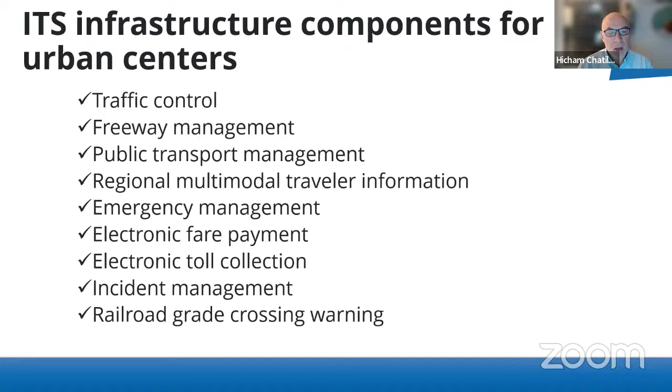Lastly, I want to talk a little bit about this. As part of the USA National ITS Architecture, there was a recognition that because we are dealing with technology, and technology moves very fast, the technology available, let's say, last year or the year before could make significant advancements this year or next year. So we have to be nimble. There was a recognition that we need to follow a very systematic approach, and so there was an adoption of what we call the system engineering V diagram.

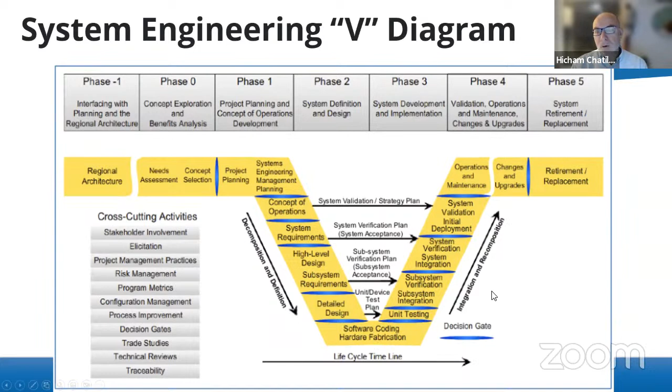This is kind of the same diagram, but this basically shows the steps of how to use the system engineering diagram. Again, there is quite a bit of information at the USA National ITS Architecture website I showed.

So you start again, if you don't have an architecture, you can still start at the concept level, then develop a concept of operations, or what we call a ConOps, and then you develop the functional requirements, then the high-level design, detailed design, and then the system software development.

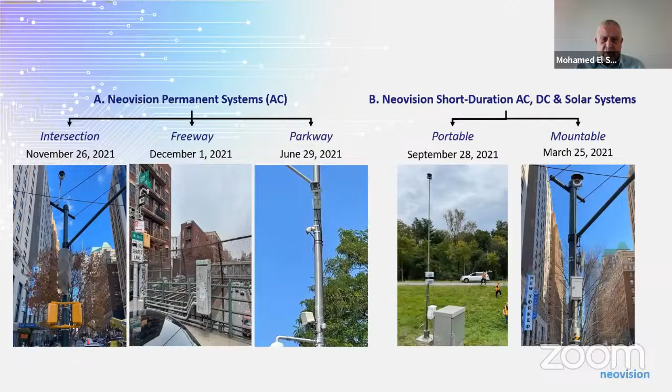We produce two types of system. They are next generation, real time, and here we're going to focus on the systems that we are currently testing with New York City successfully, and they are for intersection and parkway. They are AC, and we also have our short duration AC/DC, which are good for AC/DC and solar. You can see both of them on the screen.

The permanent system components as hardware: the most important components are the camera, which for intersection is the Axis P3807 network camera. It's a very good camera, it has 4 lenses, and our edge computer, which is top of the line, and it's made in Taiwan.

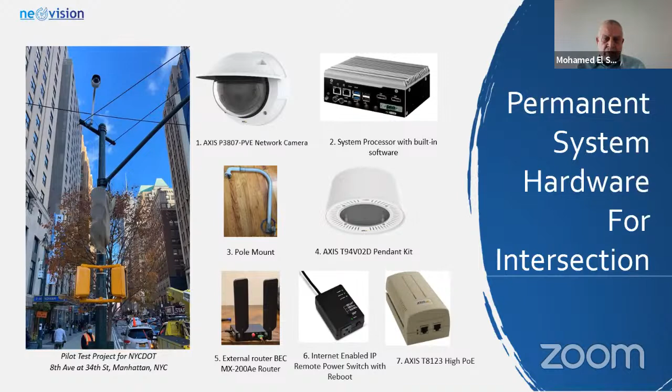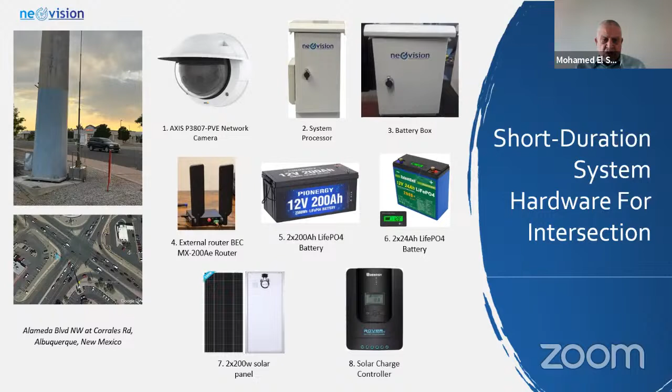These are the hardware components for short duration, which is also the same camera and a processor that is designed, planned and produced in Turkey. And it shows the solar and DC type of power. As software, it has the 3 important.

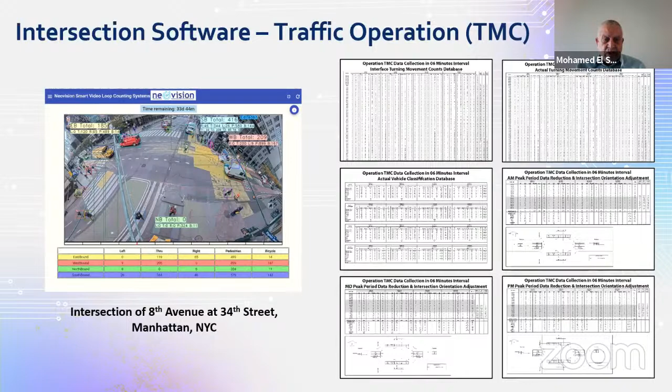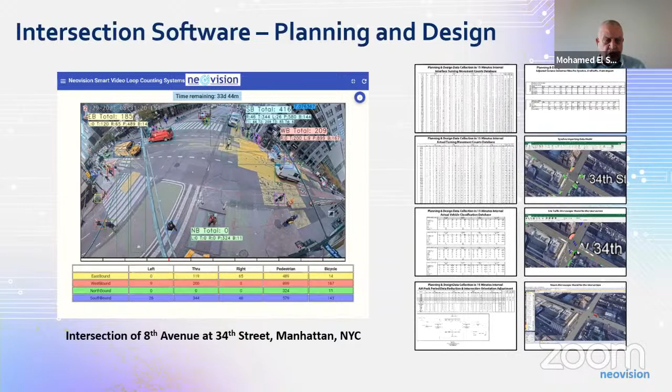It is good for traffic operation monitoring. It is good for multimodal data collection, and it's good for providing traffic analytics, just a good group of measures of effectiveness. And as we said, it's good for the real-time traffic system management data, and at the same time, it's good for data for planning and design for engineers to use.

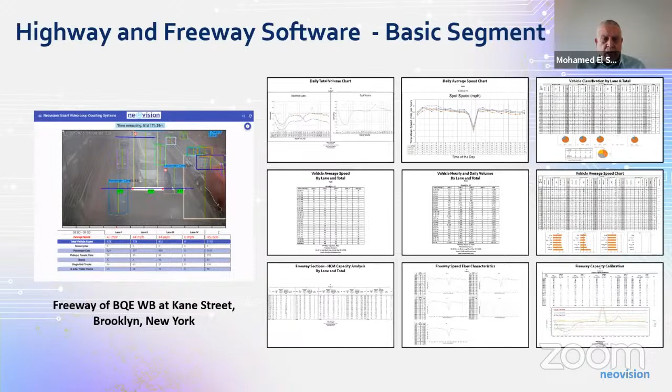And it's also good for uninterrupted flow facilities, and it produces a full package of Highway Capacity Manual results, by lane, for average speed, vehicle classification, and measure of effectiveness. It's good for the 4 components of the highway, which are basic segment, on-ramp, off-ramp, and weaving area.

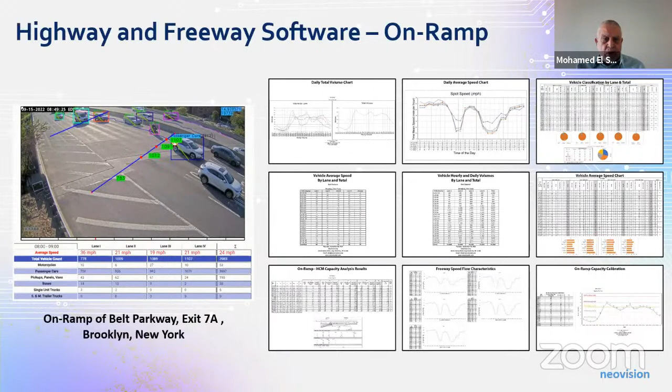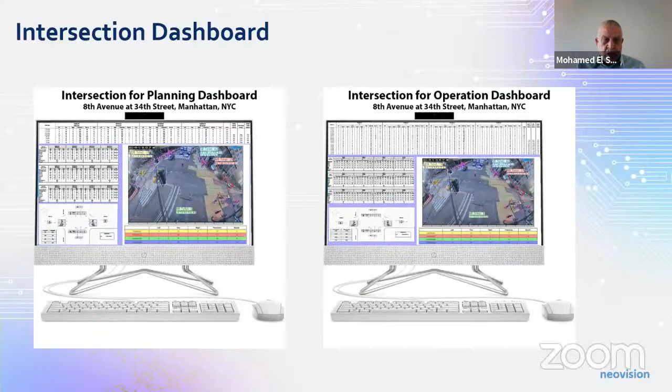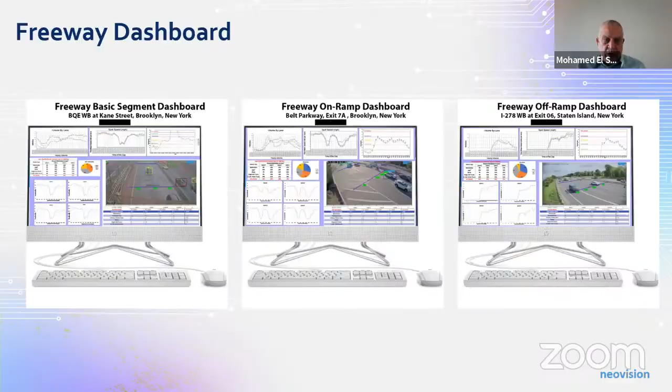Here it shows intersection dashboards for traffic management, traffic operation centers, for both intersection and freeway. This shows transmitted data to Synchro and VISSIM. So you can produce simulation, and simulation could be for existing condition, and then you can utilize this simulation for future condition with recommended improvements.

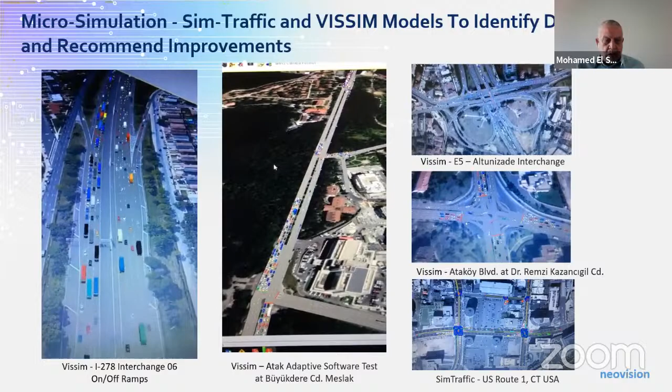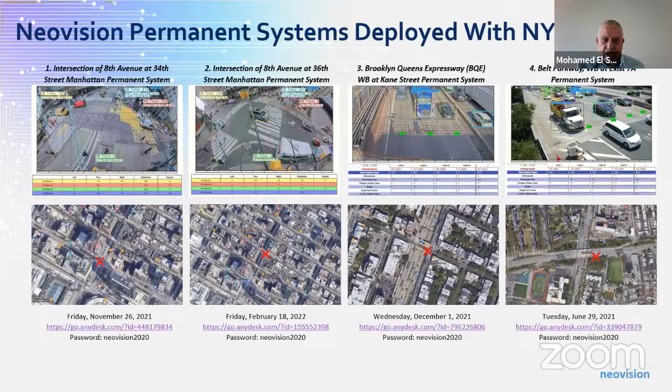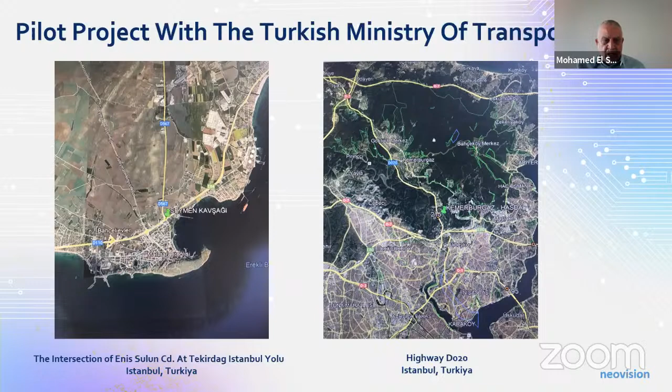And also, our system supports the future of the connected autonomous vehicle.

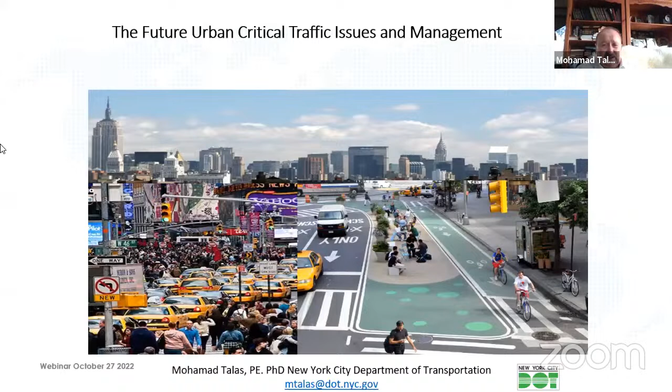Next slide, please. So the outline of the presentation: we're going to talk a little bit about the current condition and challenges of transportation, the trend and the future demand, the potential and solutions, user need and planning, present progress, and the step forward to the future.

Next slide, please. So the current condition and the challenges: we talked about urban congestion, and across the world, in all big cities, we have those symptoms, and it's not going away, with or without COVID. Yes, we had some impact during COVID time, but things went back to normal everywhere. So the demand is continuing and the growth is continuing, and we have limited space in big cities. And that's the next bullet point: limited spatial network.

Increase of demand of other modes, bike and buses. We see that now the trend, which existed basically in Europe, is that multimodal aspect and more of a share on the roadway for the biker and the pedestrian. And this is going even further. Now it's a trend in US cities as well.

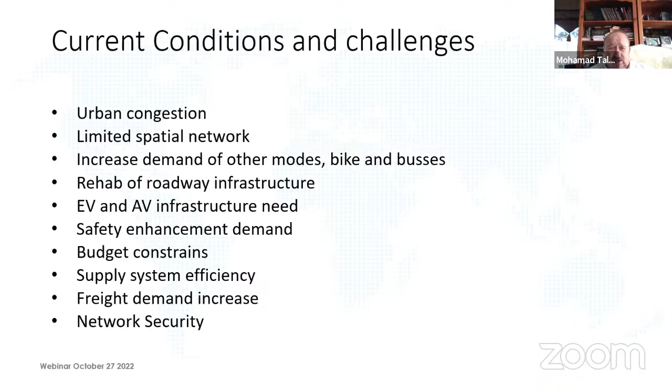A trend in future demand. The trend is based on the current, basically, and we talked about it. Traffic demand, multimodal, EV charging, AV and CV demand, smart city initiatives. Okay, we talk a lot about smart cities, and the smart city, basically, as we picture it, is right now more futuristic. I think we missed one slide by mistake.

I like to make it more simple. I like a step forward, so we can make a smart grid system. We can make smart blocks, smart intersections, smart street lights, and smart zones. Then we can end up with a smart city. This is very much feasible if we start that way, rather than the general perspective of having a smart city at the end. So this is happening, and that is the trend, and it's doable as we see a lot of deployment of the internet everywhere, and wireless communication. We'll see an example later on.

And home-based work, we talked about it. That's an increase, and the opportunity of more funding to support those deployments and those enhancements. Next slide, please.

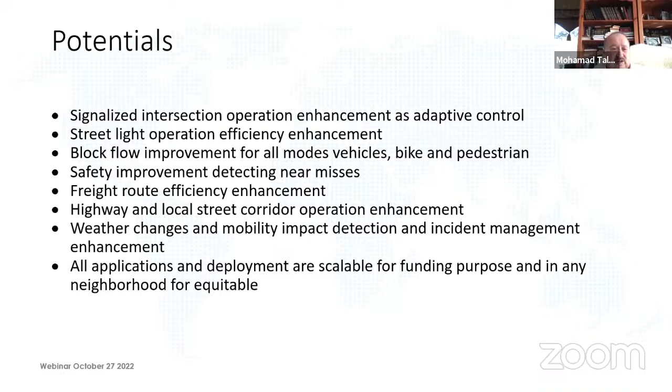We talked about scalability of funding, so we can go to the next slide. Solution. My thoughts of solution: optimize multimodal and demand management. So we have to know where we are with the current multimodal demand on the streets, including vehicles, bikers, buses, pedestrians, and we optimize basically the supply system operation and layout to handle that, and also optimize the intersection control accordingly.

The second issue, the ITS edge computing deployment to collect data. This has advanced a lot, and now it's very much doable. It can be in a small device that is added to any control cabinet at the signalized intersection and start collecting data with a very large size of memory, and at a certain point also transfer that data to a central point. This can exist anywhere at the intersection or in the middle of the block.

ITS deployment to enhance operation and control. Basically, this means intersection control upgrade, and traffic management, traffic surveillance. That all exists, and it's improving. Example, today in New York City, we have 13,500 signalized intersections, they are all controlled online from the traffic management center using a wireless service provider solution. And all those intersections have Wi-Fi and Bluetooth receivers in the modem. So at any time, we can select any link, point A and point B, and see the travel time between these two locations, or add more integrated devices to that network.

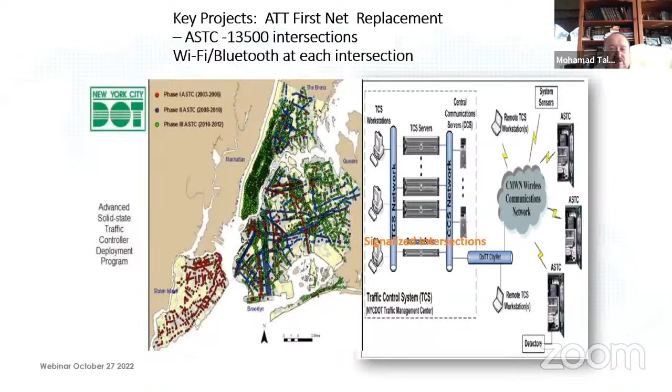And we took advantage of the light traffic. So our contractor was going from one intersection to another without issue. It was planned for 1.5 years to convert to a service provider from a city-owned wireless system, and it was done very fast. So that's an example, regardless of how large the system is, we can do the Internet of Things very quickly with wireless technology. Next, please.

Cooperative driving use cases. This is dependent on the Internet of Things of all the roadway users and the infrastructure. So everybody is talking to everybody: the bicycle, the pedestrian, the vehicle, the infrastructure also. So you enter a point, everybody is sensed at your hand with your smartphone. And with the proper algorithm and analytics, you can get the awareness to cross the street without the threat of a vehicle

heading into that crosswalk, while the driver of that vehicle also has your detection on his screen and in his audio alert. So that is cooperative driving, and it also adds on the interface to the other fixed devices, the cameras and the other sensors that are available to that in-vehicle device.

So you see here an example: basically a pedestrian, a school bus, the students are connected, the bus driver is connected, the vehicle ahead is connected, the signal is connected to that in-vehicle device. So you have a safer operation. So everybody senses who's adjacent to his vehicle or to himself standing anywhere on the roadway.

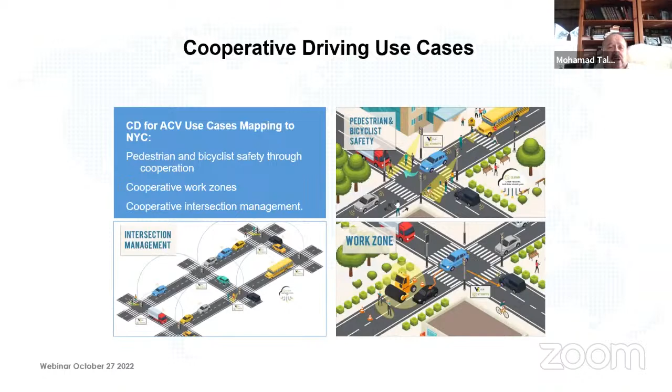Next slide, please. Smart grid system, we talked about it. Okay, we have an opportunity here with the smart grid system to improve safety, as we can detect the movement, analyze near misses and avoid near misses.

We can enhance the signalized intersection operation with the data that we are getting in real time and change settings accordingly. We can improve travel efficiency and flow of all modes, because now the detection technology can provide us with all that multi-mode activity. We can enhance the performance of the highway and the local street corridor, as we spoke.

Incident management improvement is a potential for major weather changes. We spoke about one large incident that is not out of the forecast capability. The weather forecast capability can have a big impact on mobility, specifically if you have issues during rush hours and stuff like that. It multiplies even more. And specifically also, if you have limited access points, the traffic has to go to those access points, bridges and tunnels, and you have issues.